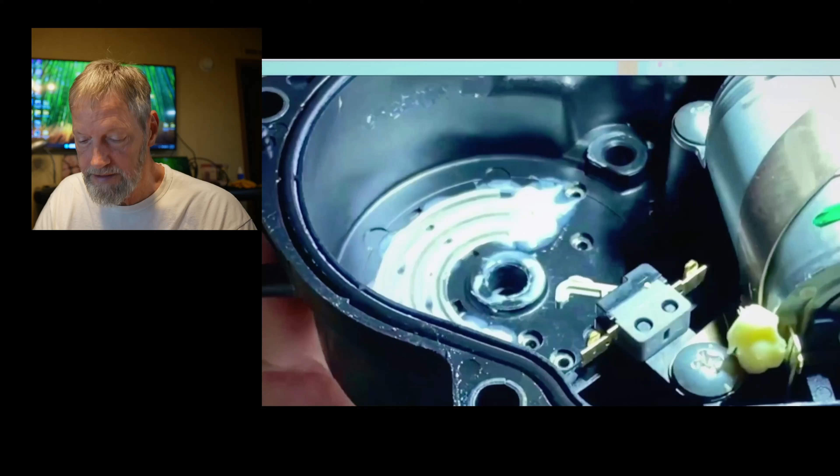Let's get rid of some myths here because I've seen this done. This is not white lithium grease. This is a contact lube, non-conductive. If you have to reuse or have to clean that off, I would take my fingertip, pull off as much as I can and put it on something, cellophane, something like that. And then you can take and wipe that back on. It don't take as much as it's showing there, but it don't take a whole lot.

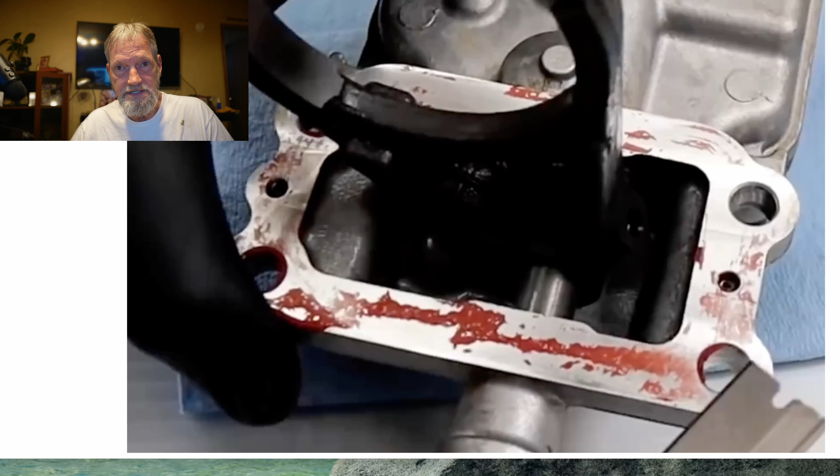Now in this picture, that's another myth. This is red RTV high temp. It'll actually break down in some gear lubes, so you don't want to use that. That's a machine surface, and Toyota uses anaerobic. But you don't have to. You just got to have a RTV that's okay for gear lube.

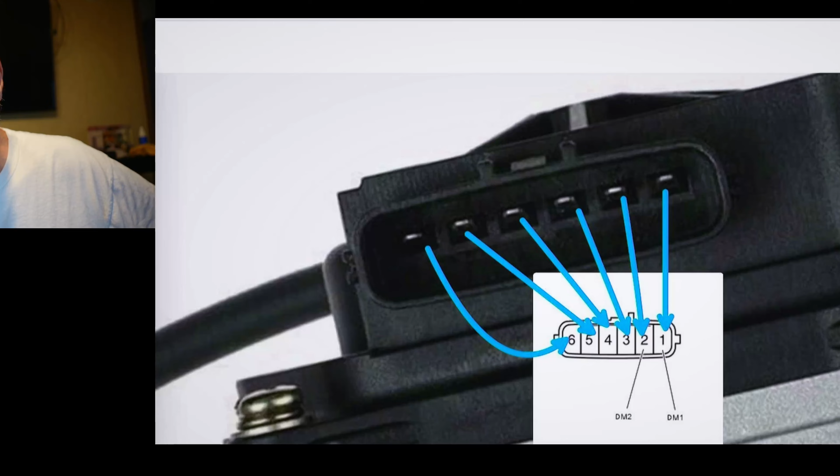There's a ton of videos out there how to repair ADD. This video is how to check and see what portion of the ADD is going wrong. In this illustration, you'll see this is the exact numbers. So when we refer back to it, we'll know where our numbers is.

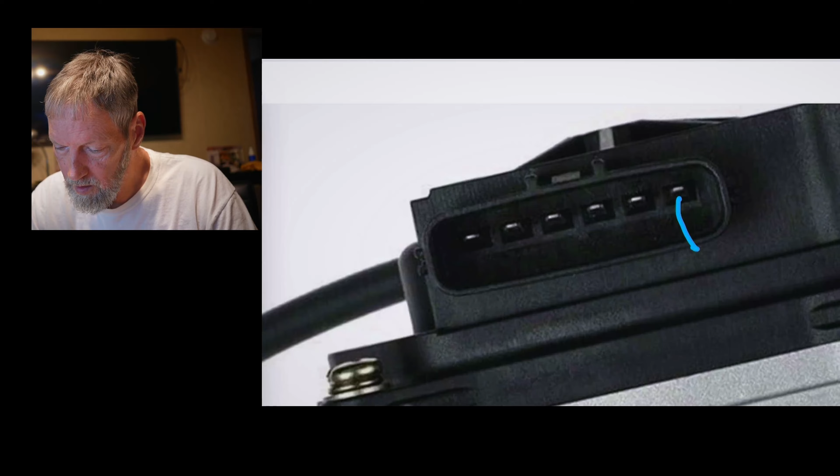Now, before we disconnect anything, if you can, it's preferable still on the vehicle so nothing's jarred or changed. Remove our connector. Now, with our meter set to its lowest scale, we want one lead to go to 1 and the other lead to go to 2. 1, 2, we want to see between 1.5 to 10 ohms resistance. Okay, if this is out of specs, we know it's inside the housing. We're going to have to disassemble it and look, see if it's the actual motor or the contacts.

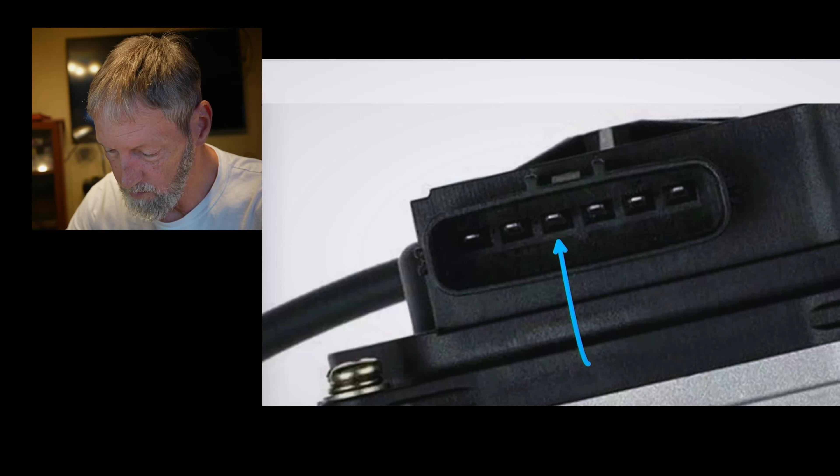It tested okay. Now we can move over and we'll test these 4 terminals. Now we're going to take 1 lead of our meter and we're going to go to 4. Now that's supposed to be grounded, so that's the one that's going to feed the ground to everything. So we're going to put 1 meter lead there, and we want to check the other 3. Now in 2-wheel drive, we're going to put 1 test lead on 4, the other test lead we want on 6, and we should get under 1 ohm resistance.

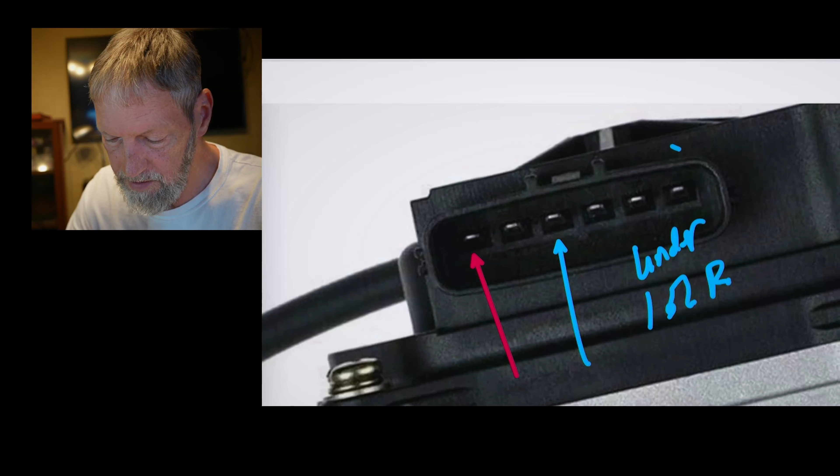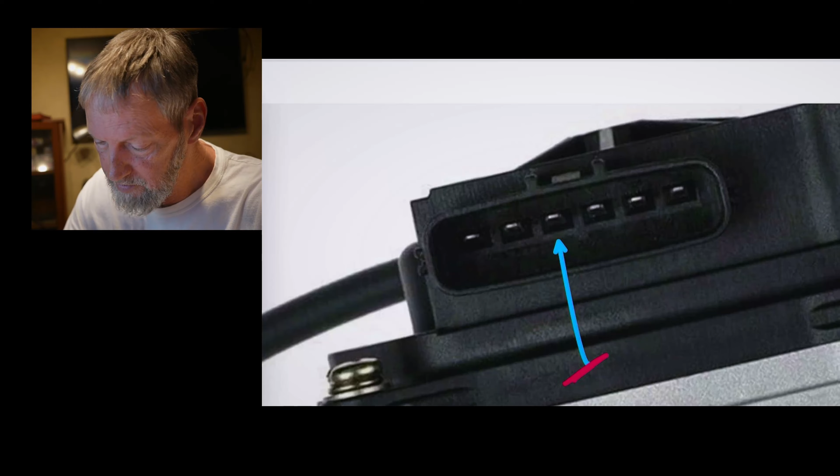Now this circuit is actually what tells the ECU that our connector is plugged in and that the circuit is in 2-wheel drive. Now with our test meter still set at its lowest scale and still hooked up to pin 4, we're going to move on to pin 3 and pin 5, and we should have over 10,000 ohms resistance.

Now, if everything's checked out okay so far, you may have a problem on your harness side. If any one or more of the tests didn't check out, we know it's inside our ADD. In our next test, I'll show you what each pin does.

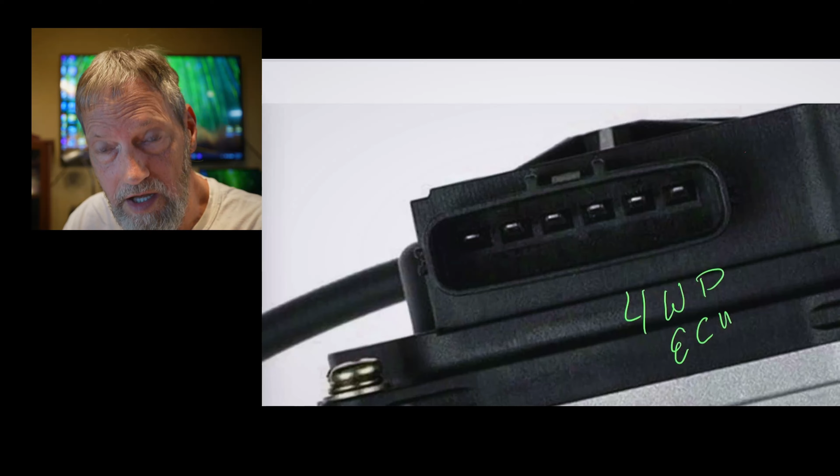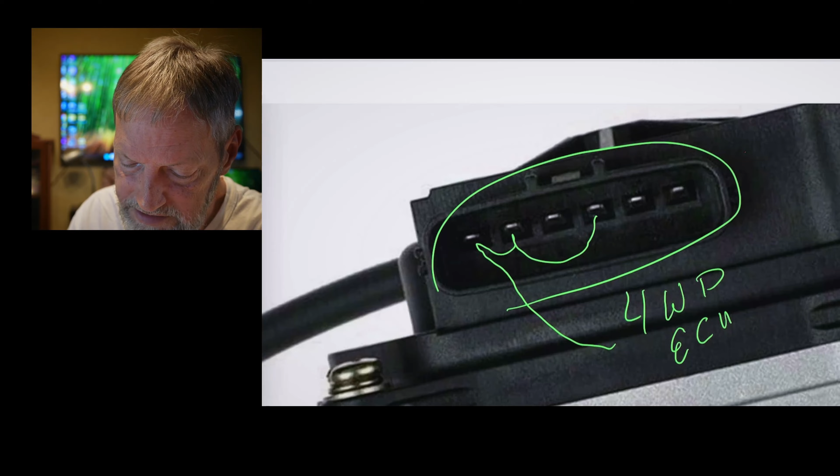Okay, here's what happens. Our four-wheel drive ECU sends what is called a reference voltage. It'll send it to this pin, and this pin. And that lets it know what state the four-wheel drive's in and if our pigtail's actually plugged in. And pin 4 is going to a body ground. Now this reference voltage needs to be 10 plus volts. It's sending this reference voltage to pin 6, pin 5, and pin 3.

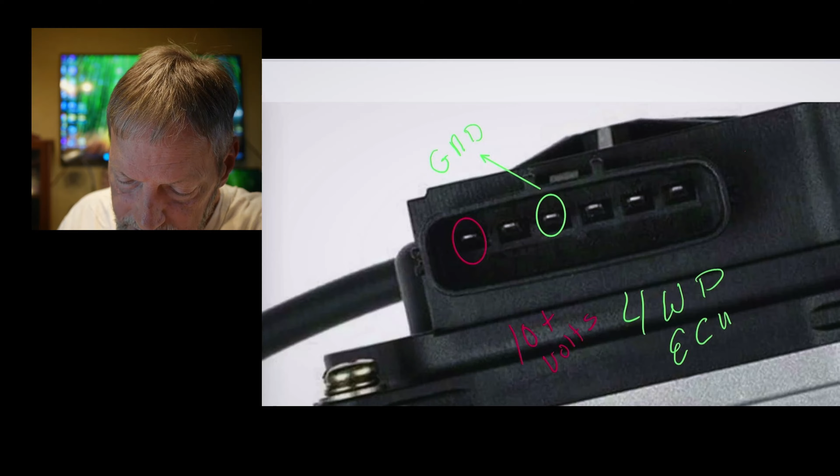If I see 10 plus volts, I know I've got a bad ground or this wire is open. Now, if I see 8 or less, then it could be just the ground has got a bad connection or corrosion. Now, in this illustration, our circles in green represent under a half a volt. The lower it is, the better, but you can probably get up to a half a volt. And the red circles represent 10 plus volts.

So we want our ignition switch on, we want our battery fully charged, and we want to set our meter to 20 volts. And you'll notice that we've added a third green dot, and that tells the ECU that the motor is actually shifting. We're not in four-wheel drive, but we're moving to four-wheel drive. Now, once the ECU sees these three circles are under half a volt, then it determines the motor's moving, and it's considered about the halfway mark.

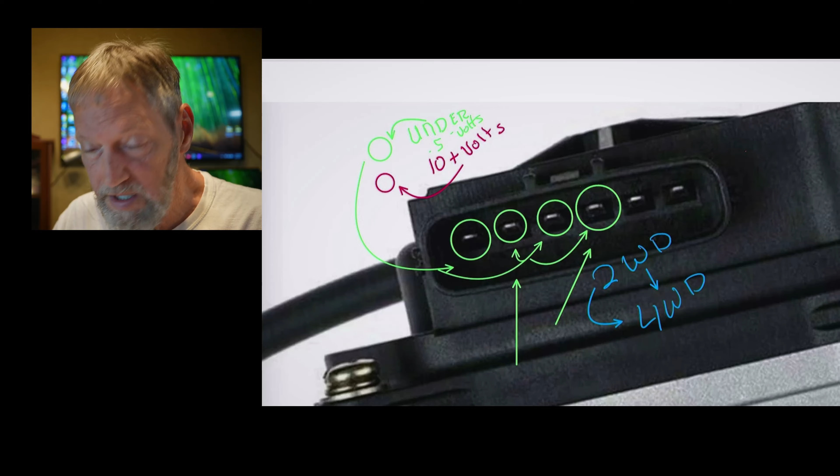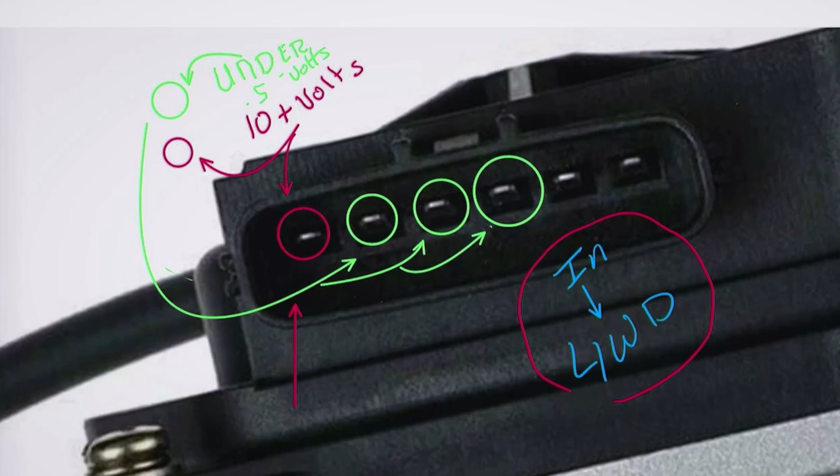Now, if you look in this illustration, we've added the fourth green circle indicating pin 3 is now down below a half a volt. The ECU is still considering this transition. That's about our 3/4 mark. That means our splines are lined up. Now you'll see in this illustration, we now have pin 6 at 10 plus volts. That tells the ECM, or the four-wheel drive ECU, that we're fully engaged in four-wheel drive.

That's our 100%. Now when running these tests, we need our front wheels off the ground so we can turn our wheels. We're checking voltage, not continuity, so we want it on voltage, and we want our battery to be at least around 12.5 volts. Now, in running all these tests where you have voltage, we've got to have our connector connected, and we're going to back probe these same wires.